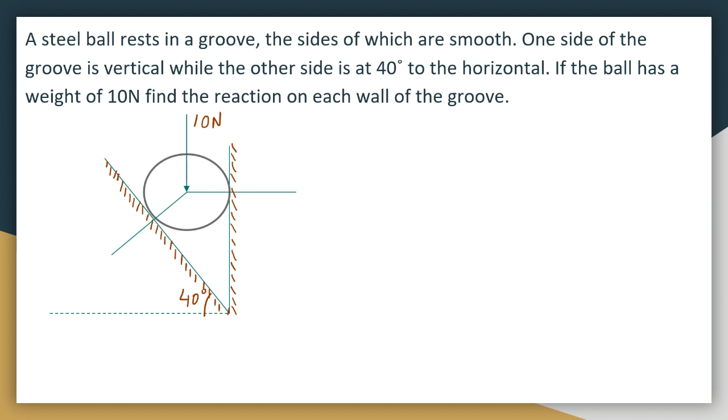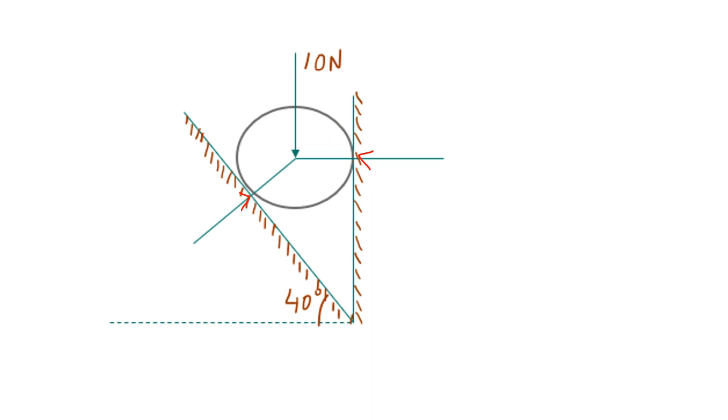Okay, so let the reactions which we need to find out be R1 and R2. We have to find out the angle R1 and R2 make with the vertical or the axes. Okay, so first we will extend this R1. We know this angle is 90 degrees. So what will be this angle? It will be 50 degrees. Altogether it should make 180 degrees.

Then we have to find out what angle R1 is making with the vertical axis. This is the y axis, this is the x axis. We know this angle is 50 degrees and this angle is 90 degrees. So what is this angle? It is 40 degrees. So R1 makes 40 degrees with the vertical. So we have this inclination, and 10 Newton and R2 don't have any inclination. 10 Newton is vertical and R2 is horizontal.

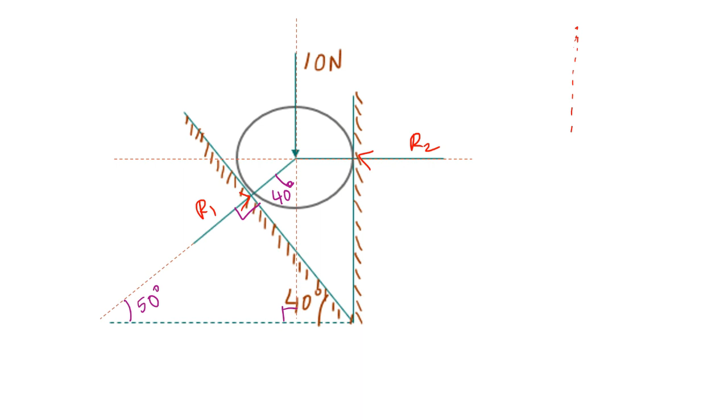So what we have to do next is draw the free body diagram. Okay, first let us draw the axis. Okay, this is the axis, and we have R1 going in this direction. So I'll draw this as a dotted line and this as a solid line. This is R1, which makes an angle of 40 degrees with the y axis. If this is 40, this is also 40 degrees.

Okay, and we have R2. R2 is going in this direction. Then we have 10 Newton in the downward direction. Okay, this I have extended to this. Okay, so these are the angles.

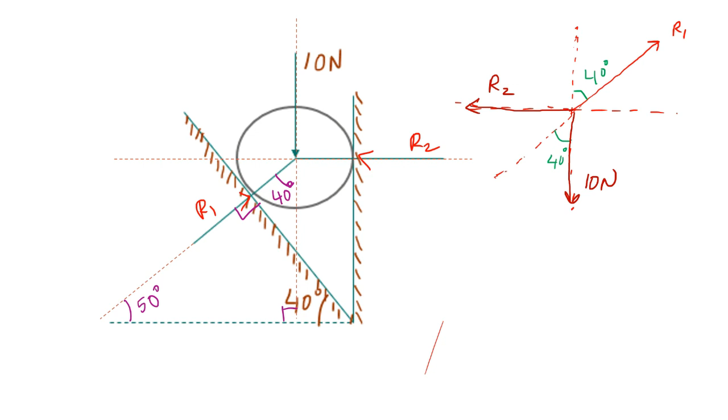So we will use Lami's theorem for solving. Lami's theorem is very simple, you know. Rest of it you know. You can start with any of the force components. Okay, let's start with 10 Newton then. 10 divided by... What is the angle? This is 40 degrees, this is 90 degrees. Therefore 90 plus 40 is 130.

10 by sine 130 is equal to, try to say along with me, R2 by, which is the angle? This is 50 degrees, therefore this is also 50 degrees. Altogether this is 90 degrees, 40 is this much, so this is 50 degrees. So we have to find sine of this angle: this much is 50 and this is 90 degrees, therefore sine 140. Sine 140 is equal to R1 by sine 90.

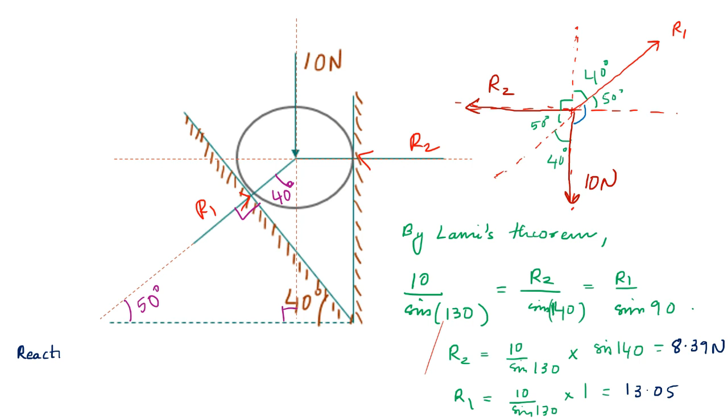The inclined wall is what? R1. So 13.05 Newton. Don't forget Newton, okay? Vertical wall is 8.39 Newton. Okay, that is the final answer.